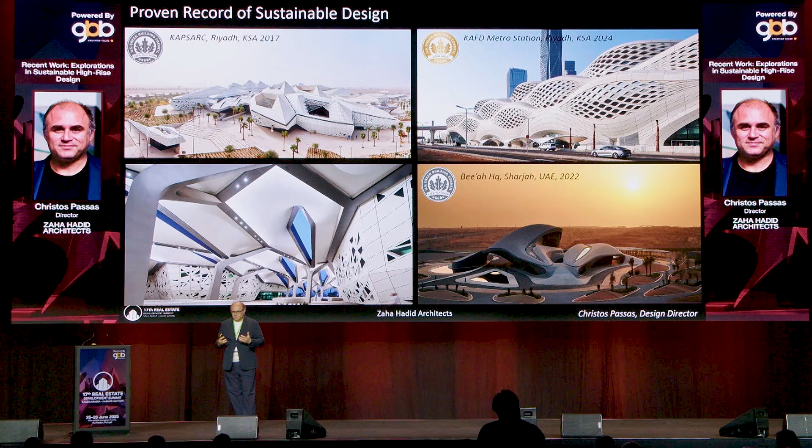have been deeply engaged in the Middle Eastern market, and especially with our engagement in Saudi, we have had a chance to develop some interesting buildings that are a testament of our ethos and also the continuous endeavor and collaboration with our clients to develop a culture of excellence, but also a culture of recognizing how the different planetary regions, the different environments of the world demand different approaches for how we as architects, as developers, as clients operate.

Our buildings have been certified by important accreditation, sustainability organizations. But for us, these projects have been learnings and journeys of discovery. And of course, it's easier, I would say, to build horizontal projects, lower level master plans, where sustainability is the key driver. But what happens with high-rise buildings? What are the design approaches that can make high-rise buildings more sustainable?

My colleagues were saying, oh, you can't talk about this subject because high-rise buildings will always be unsustainable, too much glass, too much concrete or steel, the structures are too demanding. But let's think about it for a minute.

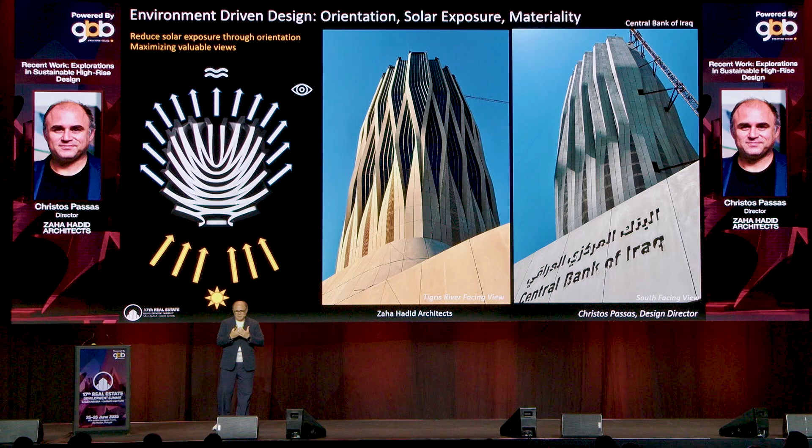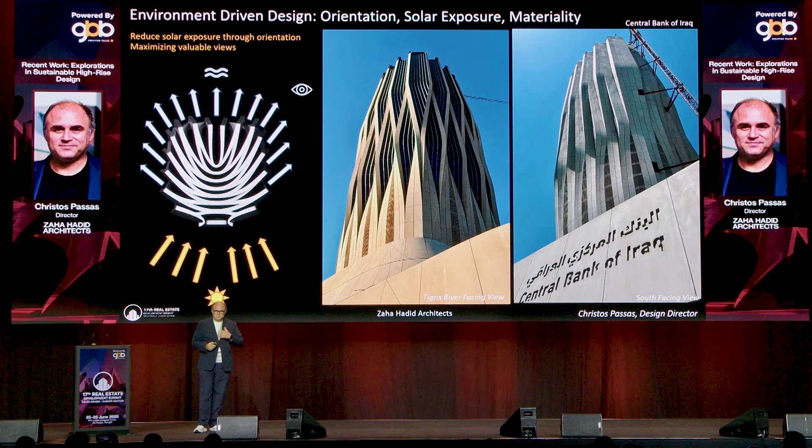Our approach and some of the experiments that we're making in different buildings, in this case the Central Bank of Iraq, are looking at an environment whereby a building is placed between the Tigris River and the south-facing sun. And the plan that we had developed is one whereby the building that faces the south side gets clad with an opaque facade that helps insulate it against solar exposure, but opens it up to the Tigris River and gives those beautiful and very cinematic views to this archetypal geographical feature.

And of course, facades and high-rise buildings don't need to be made of glass all across the world. I think the 20th century paradigm of building generic prototypes of buildings is long gone. And now with advanced computational software, we can begin to discuss how the tower facade can become a filter of the environment. So whether it's orientation, whether it's the interface that is created between the inside and the outside, become a scope of experimentation where we can begin to address a lot of these issues very effectively.

And what you can see here on the slide is several options on exactly the same building of how the facade can be, depending on where the sun is coming from, the wind, the views, etc.

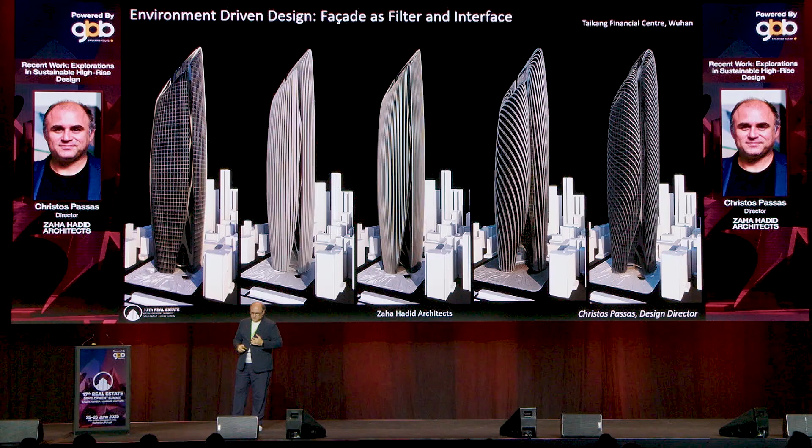But in other cases, we have also looked at the aspect of self-shading, densifying buildings, bringing them closer together to create shaded in-between areas, shading the public domain, and therefore in very hot and arid climates to also create a sense of comfort, environmental comfort in the way that people move through

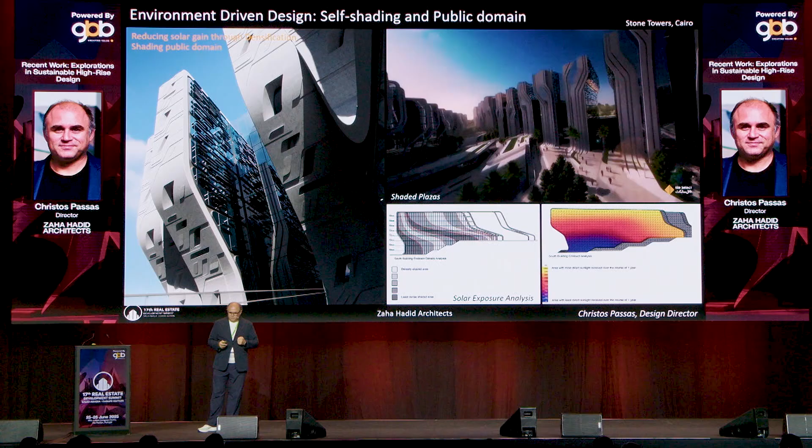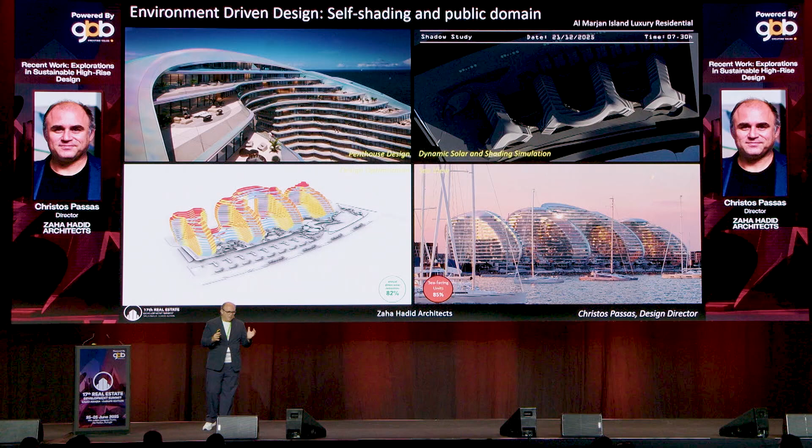these spaces. In other cases, digital simulations help us to begin to address from the beginning the solar orientation, the arrangement of the balconies, and also to begin to cultivate or to generate public courtyards or public areas where the buildings shade themselves. And this particular project was designed

with obviously the views to the Arabian Gulf as a primary asset. And because of its north-facing orientation, we managed to get about 85% of all units facing toward the sea with this simple U-shaped diagram that you see. And that's a very,

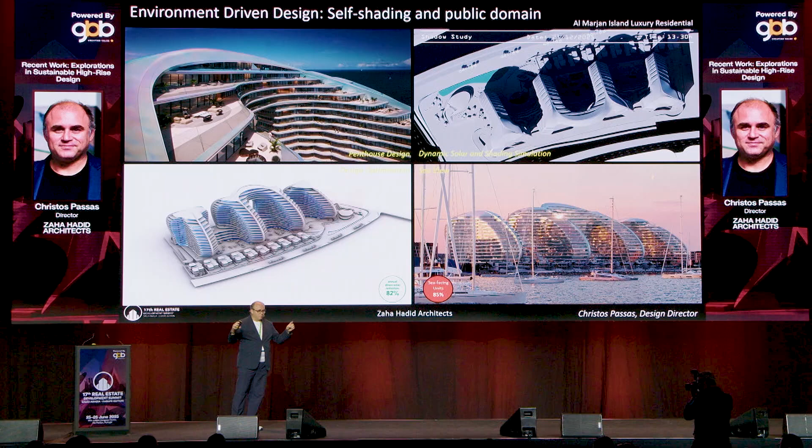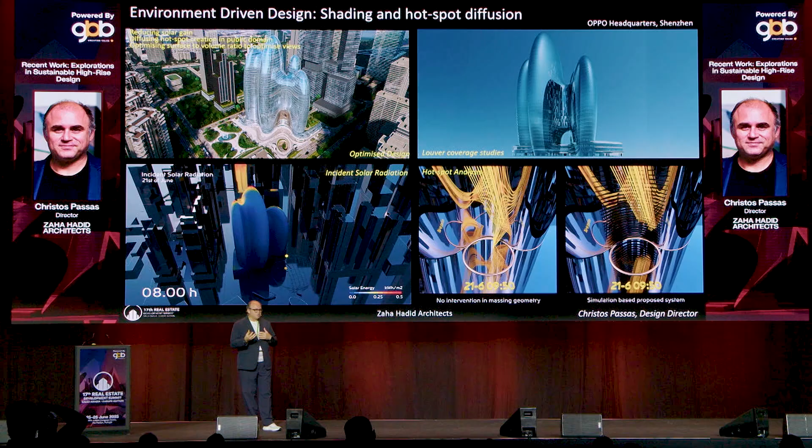very high number. In other areas, like Shenzhen, the towers can be more glassy, let's say, because the environment is different. It's more rainy, it's more tropical. But in that case, the interchange between solar sunshine and rain is so abrupt and so quick that we had different sets of problems to resolve.

In this particular case, we needed to find ways to diffuse the hot spotting created in the concave areas of the glazing of the tower, to avoid focusing light beams onto the street, and to examine forms that do not allow for overt concentration of sunlight in any one particular area.

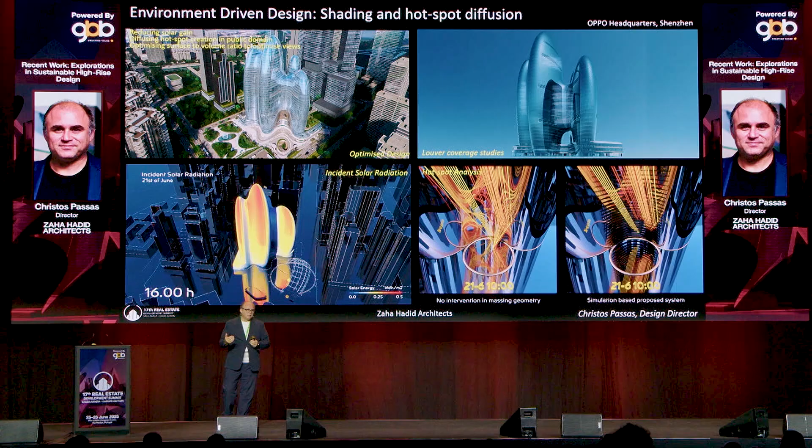Louvering has also been used extensively to address the southern solar exposure. But buildings nowadays demand more long-term resilience and future-proofing. We believe that when it comes to workplaces, the deep plan prospect of buildings gives us that extra flexibility and future-proofing ability to reorganize companies and operational aspects of these towers in years to come.

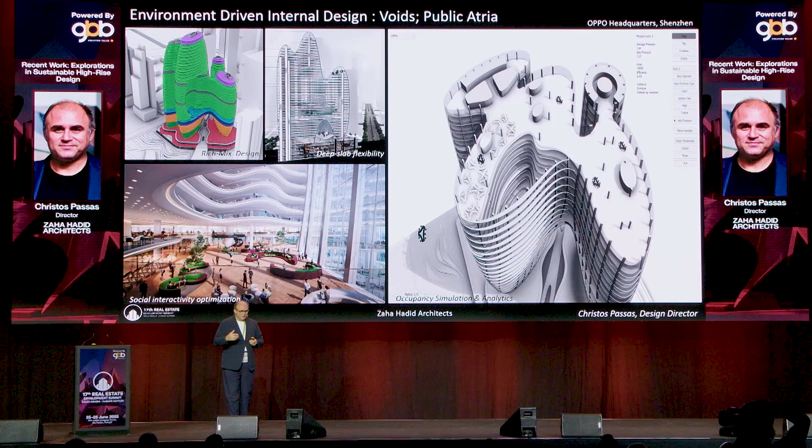We work and live in these offices for the large majority of our lives, so atria are becoming key factors in bringing together public life and work within them. We've developed a huge repertoire of atria across all our projects, from low-rise to very high-rise buildings. These spaces are spaces of social interactivity, resilience, navigation, and orientation through the building, knowing where you're moving. No more labyrinthine spaces, no more getting lost in endless Kafkaesque buildings.

I don't know if you guys know the author, but he wrote extensively about that. Therefore, these atria become spaces of joy, of expansion, of feeling architecture in its most positive way.

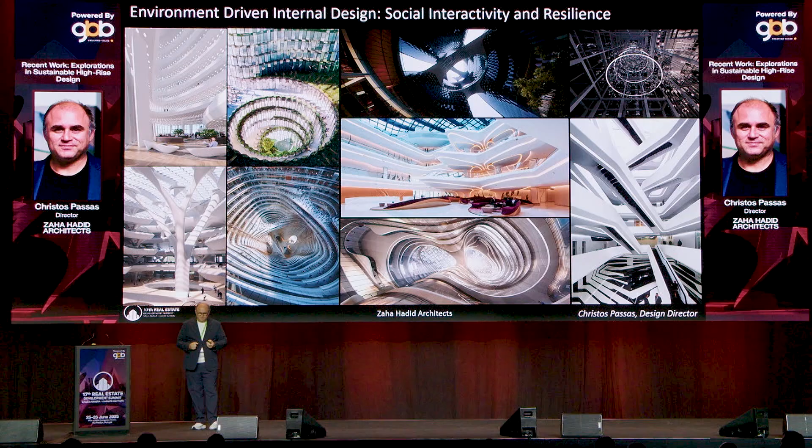And of course, atria not only become spaces of social interactivity, but they can also begin to frame the external part of the city, the external environment, and address views, monuments, orientation. So they become very generative devices in the way our buildings are designed.

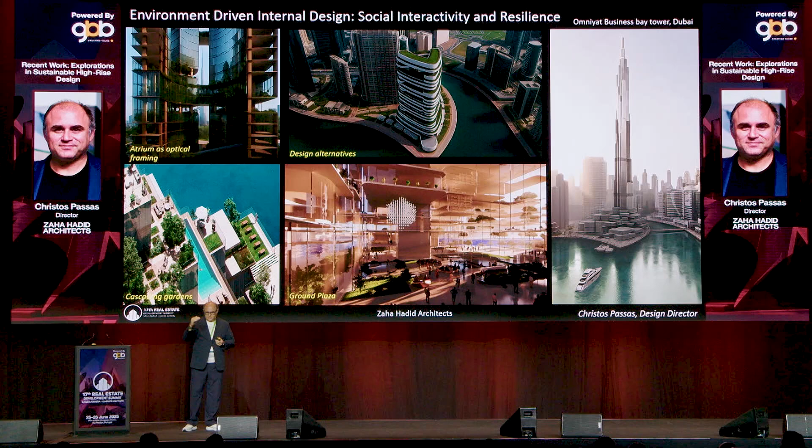Also, on this slide, in the middle top slide, you can see how ZHA works relentlessly to develop options for its clients so that we can begin to see in a very tangible way what different building forms mean for a particular site, and what are the pros and the cons.

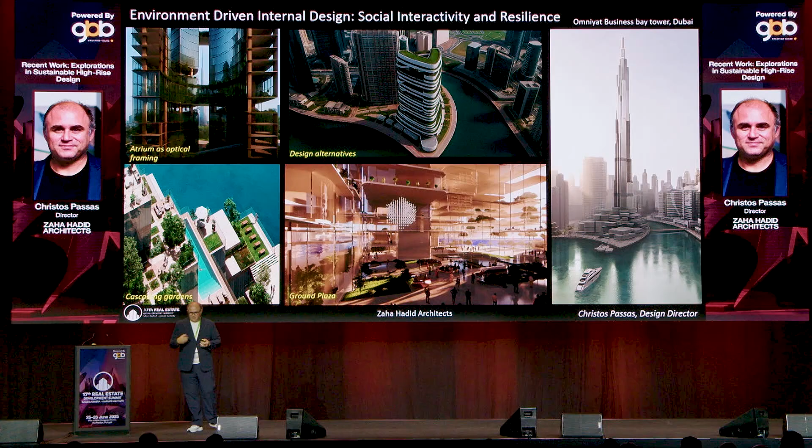Whilst it's very difficult to claim that any one building is perfect for a particular site, we can pretty much go through an exploration of enhancement and optimization to try to understand what a very good building could be for a particular site.

The idea of my presentation today is really that we can begin to develop better buildings by design - better buildings by design that looks out at the environment, that looks at its people, that looks at the way that we cooperate as individual stakeholders and entities to discover new ways and new possibilities. The realm of architecture is infinite, and if we have good and positive inspiration, we can achieve incredible things. That has been my experience all of these years.

These spaces of social interactivity become spaces where buildings now are no longer privately owned entities, but become part of the city fabric. As such, we can begin to think about buildings as public plazas, as spaces of social infrastructure, as spaces of interconnection between buildings. Think about it - nobody really designs the in-between spaces between buildings.

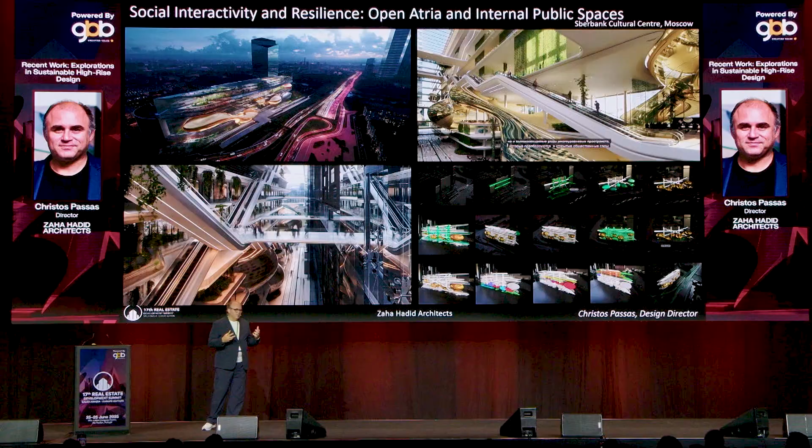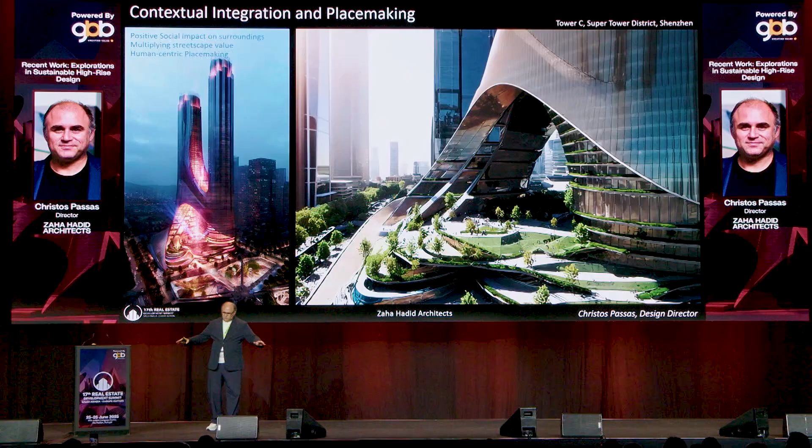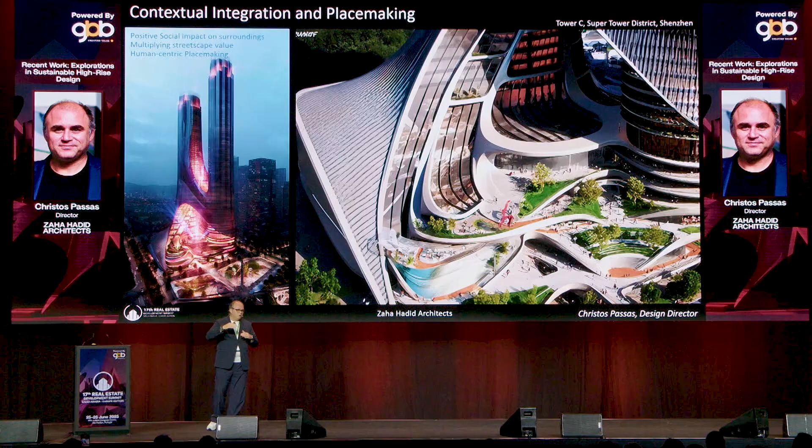We've never really explored the idea of placemaking through architecture, and not only on the ground. We believe that by multiplying the ground, we can very many times create places that elevate the street, creating degrees of segregation from car traffic, but give rise to new plazas, new places for people to inhabit.

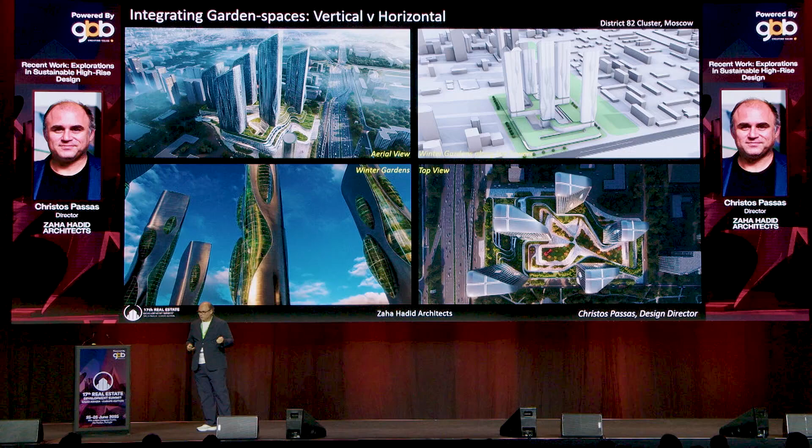And of course, buildings can also become spaces of breakout, gardening spaces, spaces where we can bring in social functions - kindergartens, educational facilities, clinics - and not just monofunctional entities of buildings that are over and over the same. So I think we can begin to hybridize the programming of architecture to achieve more, and I think that pays off for the public, the common good, but also for the clients themselves.

So we're beginning to think about networked urbanism, where buildings are not individual entities, but they are networks of buildings as urban and social infrastructure with different functionalities on different levels. The bridges can become new streets or pedestrian streets that allow people to connect within their buildings.

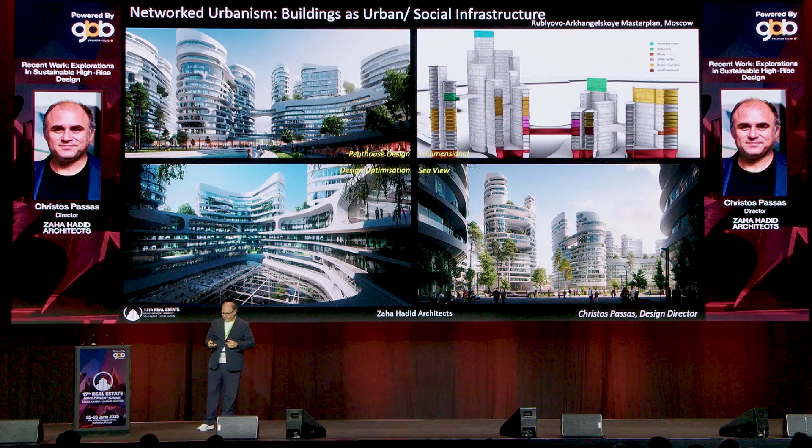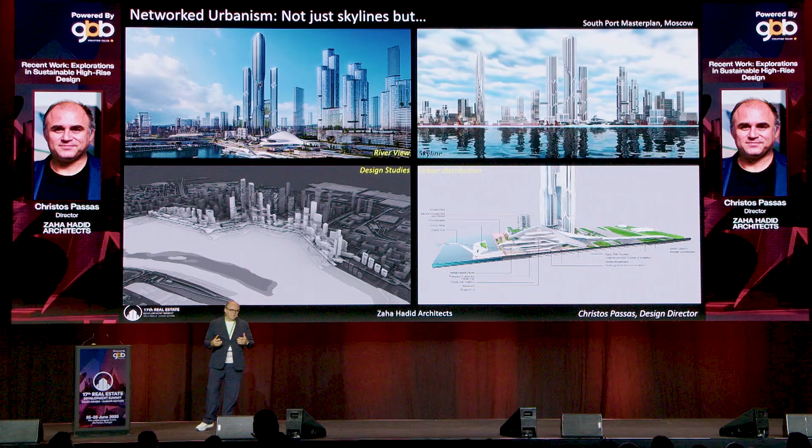High-rise buildings is not just about skylines, not just about the iconic, about the signal, although they do that very well. It's also about three-dimensional organisms. We can begin to think futuristic cities are intensively interconnected entities where people, mobility, and goods travel together in orchestrated systems—not fully controlled perhaps, but orchestrated systems that allow us to utilize the interconnectivity between the different levels in a very much three-dimensional or even four-dimensional way.

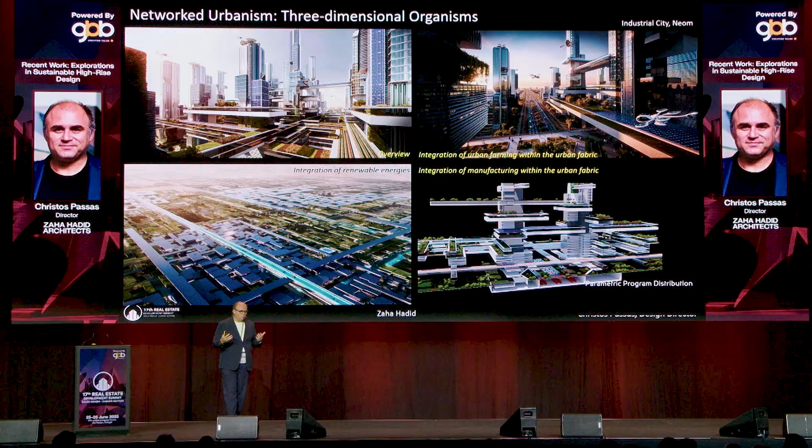And why not begin to think of our cities as green and blue, technologically driven entities where we look at renewables, and we look at greenery and nature, and we begin to create these hybrid cyborg-type entities where we cultivate both nature and technology, finding that fine balance between these two trajectories that oftentimes tend to push in opposite ways.

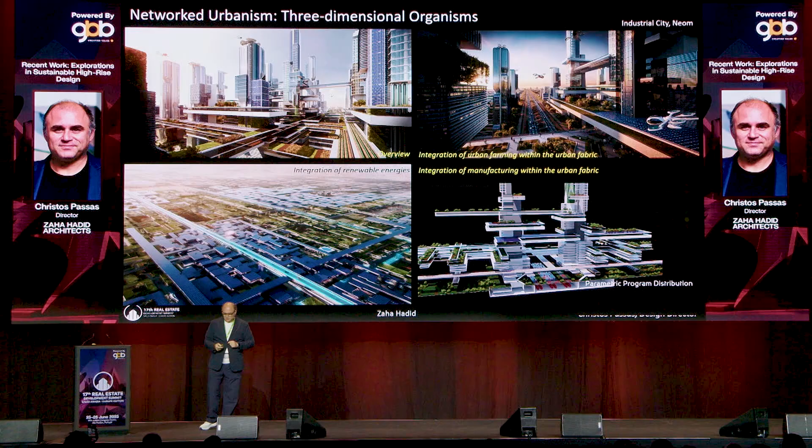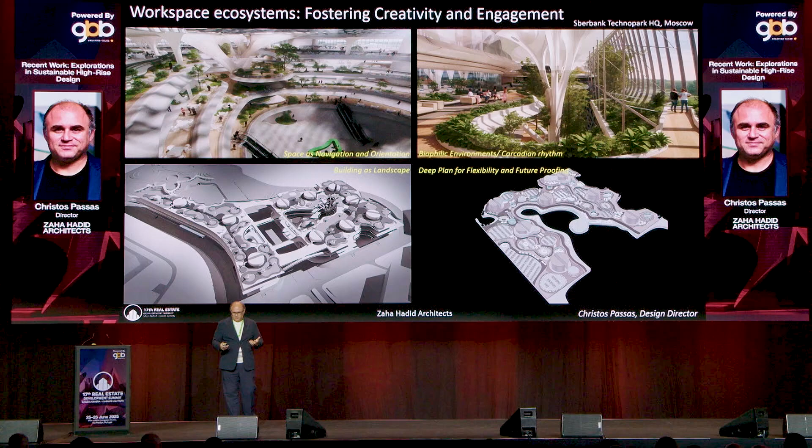Buildings are not just for living, not just for hospitality. I think we're also looking at workspace ecosystems or habitation ecosystems. We're beginning to look at how we can foster creativity and engagement in the types of spaces we build. So biophilic design is at the core of what we do—not just about greenery and greenwashing, but about understanding these buildings as places where nature can grow inside. And nature, as much as plants are nature, so are humans nature. So we want to see humans thriving in these environments.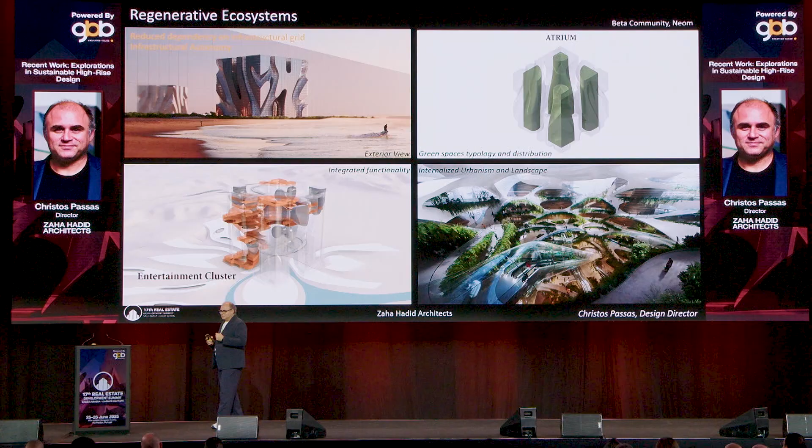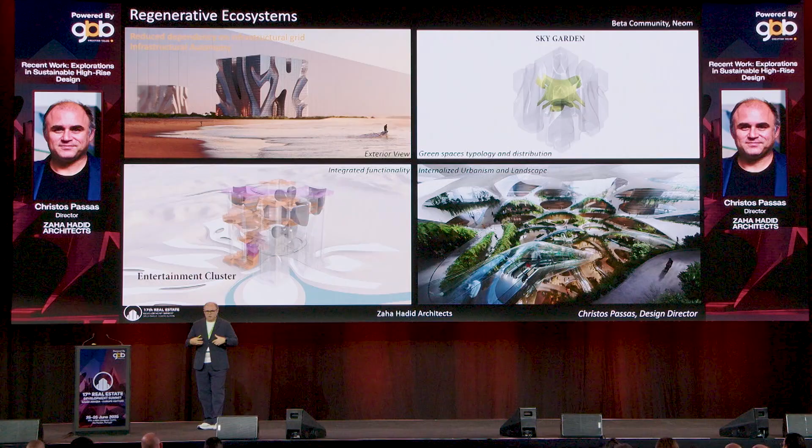We've also experimented with communities or ecosystems that are regenerative and almost wholly autonomous from the public grid. In some cases, we're beginning to rethink what buildings that are off-grid mean and what they look like—developing mini cities that are a cluster and agglomeration of multifunctional entities with their own set of infrastructures for waste management, water filtering, recycling, and regenerating the whole flow of energy and materials within them. It's a very interesting topic, and we hope to create new partnerships to develop these thoughts further.

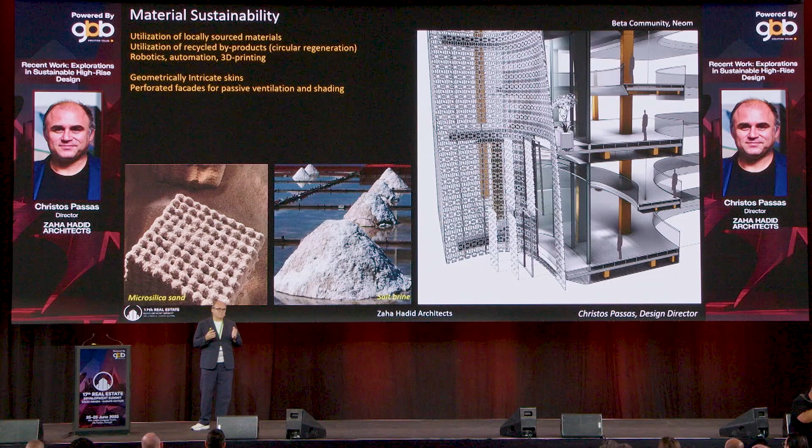Material sustainability is, of course, one big topic, and I'm not going to get into it today, but suffice to say there's a lot of waste products that can be used, recycled, sorted, sifted, and 3D printed to create new building materials—anything from perforated facades to geometrically intricate decorative pieces. When we see microsilica sand, or salt brine, we can begin to think and speculate how these materials can be used as part of the building process, because they can be locally sourced and easily transformed and handled.

Last but not least, Saudi, for me and my team, has been a very daring engagement with the environment—not only the Saudi people, who are amazing, courageous, and visionary in themselves, but also that beautiful environment that we, as a design industry, have had the chance to learn about: the different types of deserts, the different types of species, the beautiful beaches, the relentlessly hot environment, but also the beautifully cold and snowy environment, for example on the peaks of Trojena.

So a closing remark: the future is up to us. We can all decide to do better any given day, and we're very grateful to be able to share these thoughts with you today. Thank you.